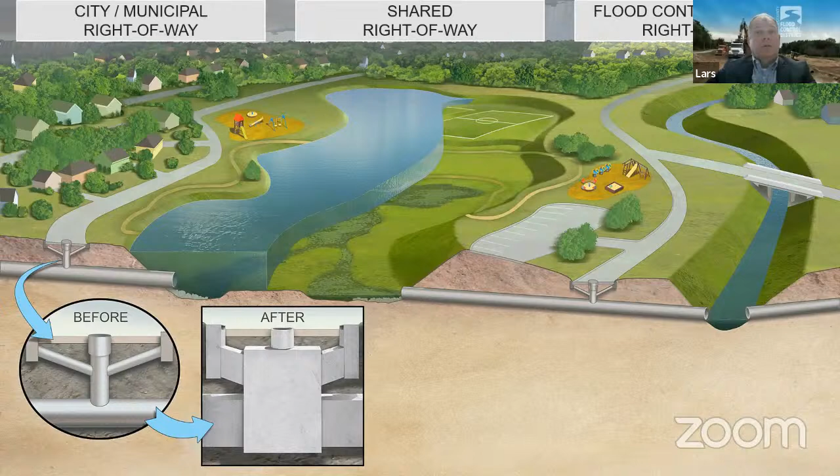On August 25th, 2018, Harris County voters approved $2.5 billion in bonds for flood risk reduction projects. This vote followed a series of 23 meetings with community members across Harris County, one per watershed, which resulted in a list of what is now 181 bond projects. The actual timing of each individual project depends on a variety of factors, including environmental permitting, right-of-way acquisition, and utility relocation, and in some cases, requirements of a particular grant. Project lists and projected schedules are updated regularly on our website at www.hcfcd.org.

As bond projects move forward, we are making significant progress toward resilience in Harris County. We shared an update with Harris County Commissioners Court in October of 2023 and highlighted a few notable statistics. Since the inception of the bond program, we have completed or closed 29 bond IDs, secured $1.7 billion in partnership funding to stretch the bond funds even further through our community, and hosted more than 195 community engagement meetings where we received more than 9,000 comments from attendees. Your input is critical to our efforts, and we want to ensure our conversations continue. We will continue these updates moving forward to share progress on the program.

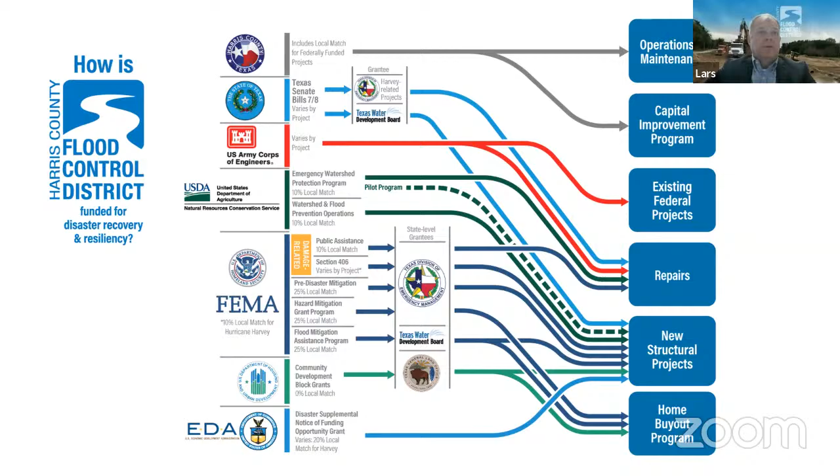We will now move into the part of the program that is specifically about Halls Bayou watershed and the tributaries P118-23-00 and P118-23-02 conveyance improvements and related stormwater detention project.

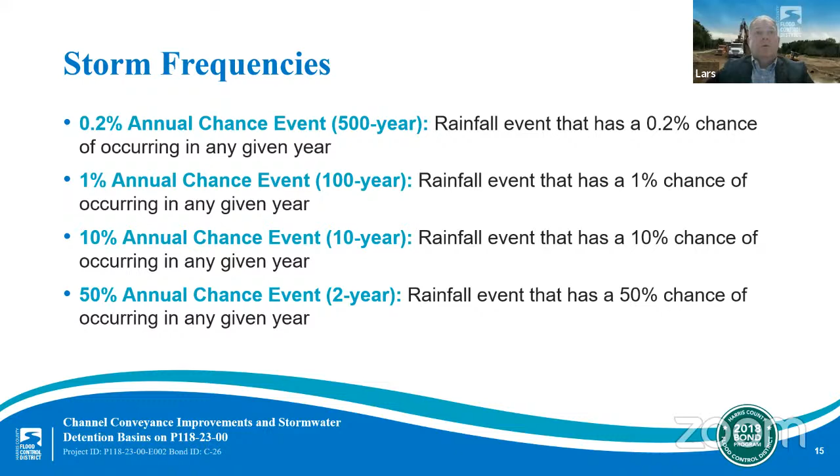By the same token, a 10% chance or 10-year event is a rainfall event that has a 10% chance of occurring in any given year. And a 0.2% annual chance, or 500-year event, has a 0.2% chance of occurring in any given year. It is also important to note that the precipitation depths for each of the specified frequencies are based on statistical data, and they are not related to each other. For instance, a 100-year storm does not have 10 times the rainfall of a 10-year storm.

Now we will get into more specifics of the project we are discussing tonight. The proposed project is bounded by Hardy Toll Road to the east, Airline Drive to the west, Canino Road to the south, and Halls Bayou to the north. The project is also located near the Melrose Park subdivision.

The objective of this project is to improve the system carrying capacity of tributary P118-23-00 to withstand a 100-year event, and to improve the capacity of tributary P118-23-02 to withstand a 500-year event. Please note that these are pre-Atlas 14 numbers.

It is also important to keep in mind that the full benefits of these projects will not be fully seen until Halls Bayou backwater issues are resolved. When Halls Bayou floods, the backwater from Halls Bayou may enter into these channels, reducing the effectiveness of the channel conveyance improvements.

The Halls Bayou backwater issue is being mitigated through a number of other projects proposed along the main stem of Halls Bayou. Despite the problems caused by Halls Bayou backwater, this project is still very important to long-term flood risk reduction in this area. Finally, the goal of this project's preliminary engineering stage is to provide a feasibility analysis and preliminary design of the recommended alternative.

A preliminary engineering report, or PER, will be transmitted to Harris County Commissioners Court once public comments from tonight's meeting are incorporated.

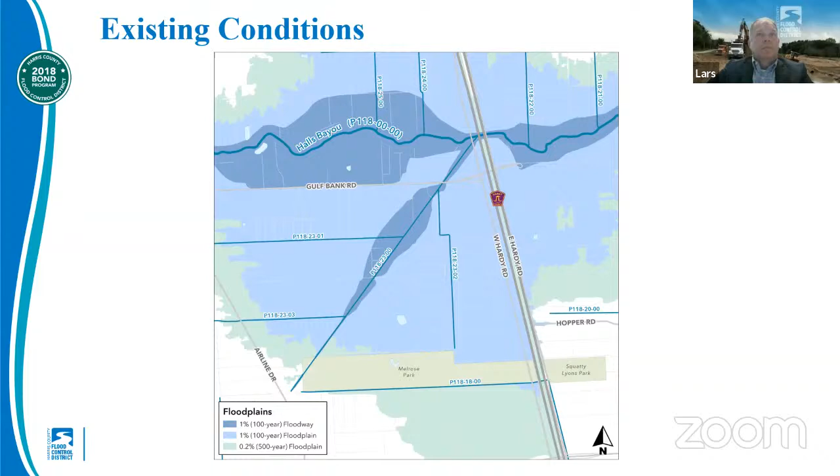I'll now discuss the phasing plan outlined in the PER. In phase 1, the flood control district will construct basins 1 and 2, which will mitigate the impacts from the future P118-23-00 and P118-23-02 channel conveyance improvements. The channel conveyance improvements will increase the conveyance, so constructing the stormwater detention basins will ensure that we are not moving the flood risk elsewhere.

Phase 1 will also construct the mentioned channel conveyance improvements on channels P118-23-00 and P118-23-02. As part of this phase, the channel flow line will be lowered, which will facilitate the City of Houston's Melrose Park subdivision drainage project. Phase 2 will construct stormwater detention basins 3 and 4 at the same time the City of Houston begins construction on their Melrose Park subdivision drainage project.

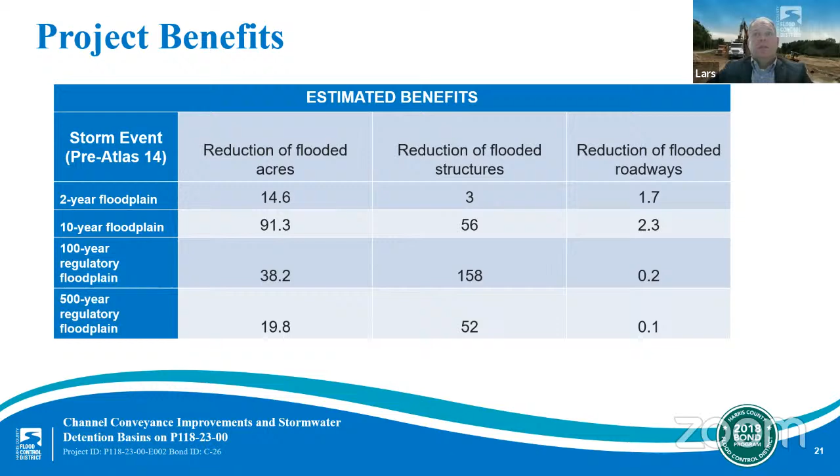This slide shows the project's estimated benefits for flood risk reduction. As you can see on the chart, this project is estimated to remove the 100-year regulatory floodplain from 158 structures and to remove the 500-year regulatory floodplain from 52 structures. Additionally, the 2-year floodplain will be removed from 1.7 miles of roadway, and the 10-year floodplain will be removed from 2.3 miles of roadway. Overall, the 2-year floodplain will be removed from 14.6 acres, the 10-year from 91.3 acres, and the 100-year floodplain from 38.2 acres. You can see additional data on the estimated project benefits in this chart.

I'll now discuss the project outlook and the next steps. As mentioned earlier, this project will be closely coordinated with the City of Houston's Melrose Park Subdivision Section 2 Drainage and Paving Improvements Project. Once completed, this project will drain into the P118-23-02 channel. The North Harris County Regional Water Authority, or NHCRWA, is also constructing a 96-inch diameter water line in the project area. We have already coordinated with the NHCRWA to make sure that the two projects have no direct conflicts, but coordination will continue as we progress with the project.

The estimated total cost of this project through construction is approximately $52.5 million. The Flood Control District is working to secure funding that will be used to construct the full project. The Flood Control District could receive up to $49.7 million from the U.S. Department of Housing and Urban Development through their CDBG-MIT program, administered by the Texas General Land Office through the Community Development Block Grant Mitigation Program, or CDBG-MIT. This is part of a more than $500 million application that will fully fund projects across the county, including 6 in Halls Bayou. An additional $2.8 million of the cost of this project will come from the 2018 bond program.

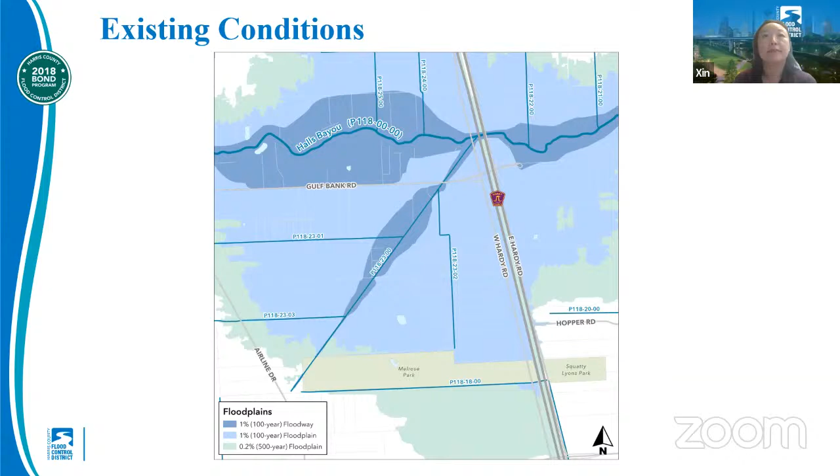Thank you. Our next question is for Gary. Gary, how has this project progressed so far?

If you could move to slide 17, please. The feasibility study for this project was completed in 2020. At that point, the PER stage began. And in 2021 and again in 2022, the scope of the PER was expanded to include the evaluation of additional areas for a detention basin and to reduce the right-of-way impacts on this project on the surrounding community.

So we're basically moving through what we call our project life cycle, which begins with feasibility, which is complete. And we're currently in the PER stage, as we've talked about, and we're trying to wrap up the alternatives so that we can continue to move the project forward.

All right, thank you, Gary. Our next question is for Lars. Lars, what is the recommended alternative for this project and why was it chosen?

Thank you for that question. So the feasibility study evaluated 8 different alternatives. The recommended alternative was alternative 8. That alternative included 3 components.

First, the improvements to the P118-23-02 tributary. Second, the addition of 4 additional detention basins along the P118-23-00 tributary, and then finally improving the P118-23-00 tributary from the confluence of P118-23-02 to the upstream end of the Gulf Bank Road Bridge. And the primary reason why alternative 8 was selected is because it offers the greatest benefits in terms of the flood risk reduction at the most cost-effective manner.

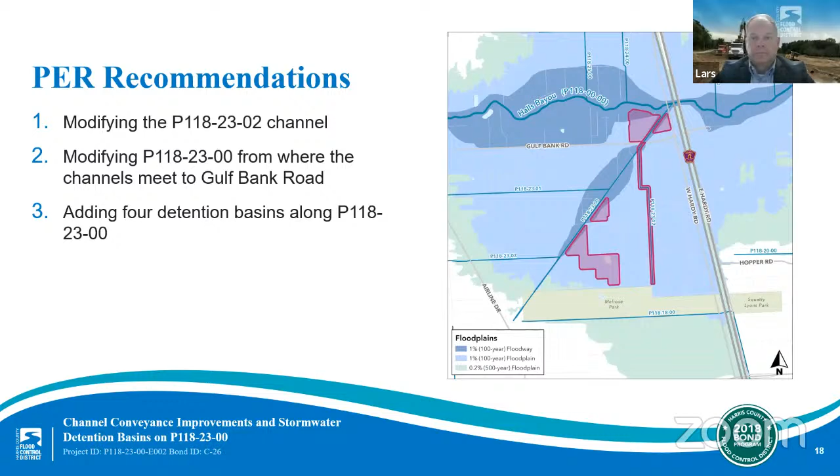All right, thank you, Lars. And one more question for you, Lars. Amanda is asking, will the drainage ditches within the Melrose subdivision be improved?

So if you could go to slide 17 again. So the Harris County Flood Control District will be, I'm sorry, the one with the map, I misspoke. But the...

P118-23-02 tributary will be improved as the backbone within the Melrose Park subdivision. The City of Houston's project will improve the conveyance and the laterals on the east and west side of the 02 tributary to convey those waters to the flood control ditches.

All right, thank you, Lars. Our next question is for Xin. Xin, what is the total amount of funding secured through CDBG?

Sure. Thanks again with the question. Countywide, I think the CDBG MIT program has more than $500 million allocated across 18 projects. And the DR program has more than $300 million across 14 projects.

The Halls Bayou itself envisions to receive 179.1 million, or over a third of these funds, for the projects in the watershed. For this particular P118-23 project, the total cost through construction is approximately $52.5 million. The flood control will receive up to 49.7 million from the CDBG MIT program.

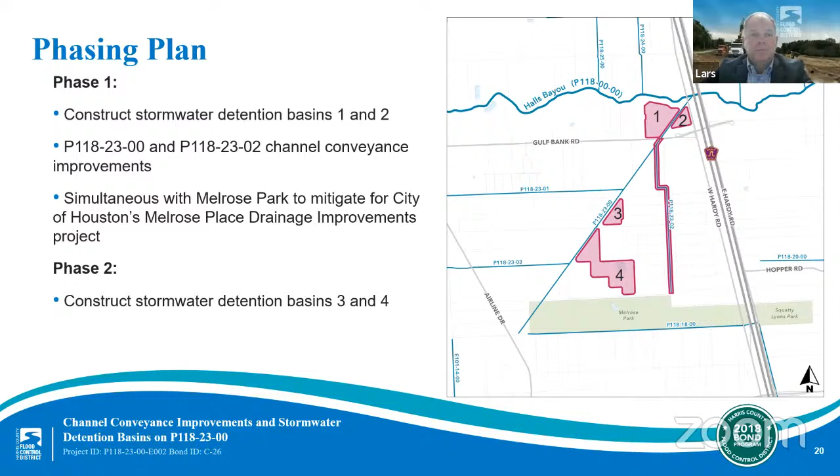All right, thanks, Lars. Our next question is for Xin. Xin, how will the City of Houston and the Flood Control District work together on this project? Sure, thanks for the question.

I'll follow up - like Lars previously mentioned, we are coordinating with the City of Houston very closely regarding these projects. That's one of the main reasons we split the construction phases. We want to ensure the Melrose Park subdivision Section 2 drainage and paving improvement projects can be constructed in time. For many of our projects, the Flood Control District has collaborated with the City of Houston to work together on reducing flood risk in our community.

Thank you, Xin. Our next question is for Gary. Gary, how will this project impact the pipeline being constructed by the West Harris County Water Authority? We touched on this earlier in the presentation, but the Flood Control District is aware of the plans for construction of a 96-inch diameter water line pipe in the project area.

It's very important, since we knew about this coming, that we coordinate. We've been coordinating throughout the life cycle of this project, and currently there are no direct conflicts between this project and that pipeline, primarily because we knew about it and were able to make sure what we're doing and what they're doing are designed to be compatible if there were ever any possibilities.

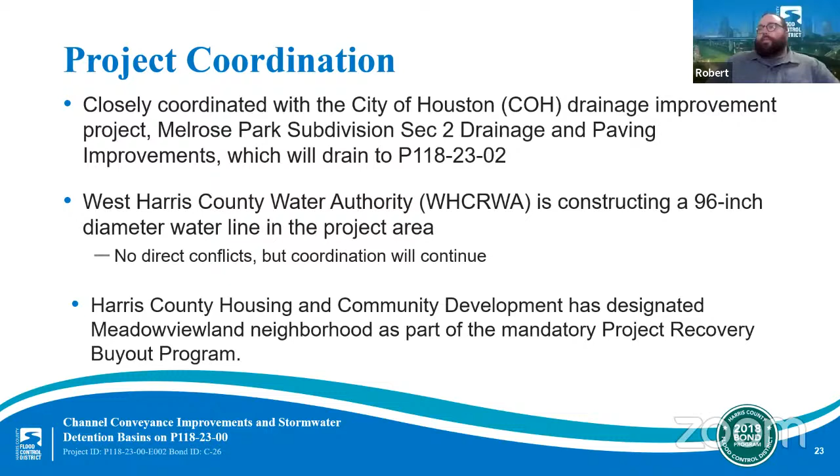All right, thank you, Gary. Our next question is for Xin. Xin, how does the CDBG MIT program work?

Oh, Xin, you are muted.

The CDBG MIT program, or CDBG mitigation, is focused on projects to mitigate future disasters and flooding. The program's criteria is similar to the other CDBG DR, with 53% of funds must be spent in a low to moderate income census tract or a census block group with a 51% or higher LMI index. Once that criteria is met, urgent need projects can receive funding even if they do not meet the minimum LMI requirement.

Our next question is for Lars. Lars, what is the deadline to spend the CDBG MIT funds? Thank you for that question. So the deadline for when we must expend the CDBG funds, having a misalignment with some of my notes here, I believe that currently it is March 31st of 2027.

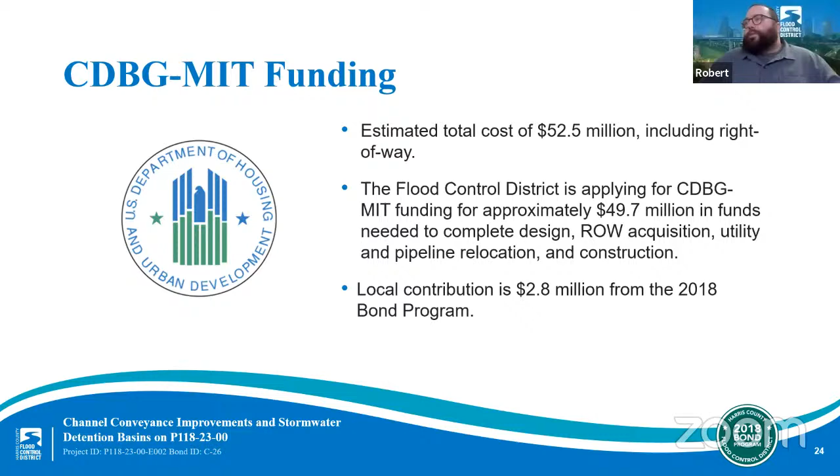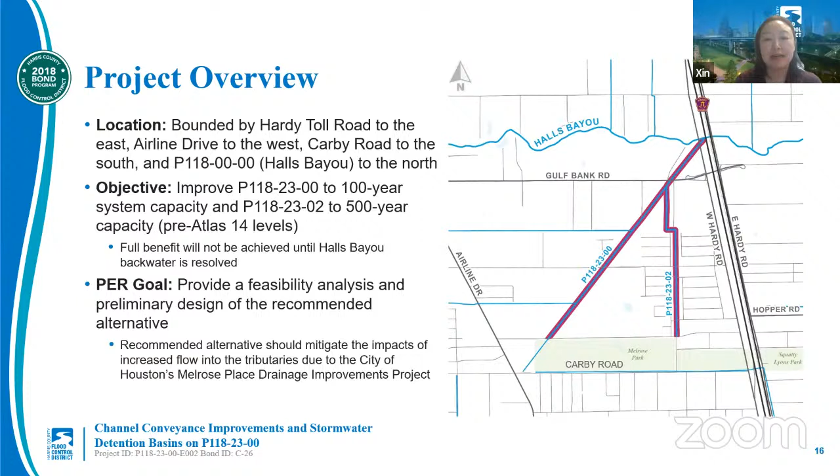Thank you, Xin. This next question is also for you. Xin, how many projects are currently under construction in Halls Bayou? We have another project we just recently kicked off construction on. It's phase 2 of bond ID 35. We started last month, and the first phase was constructed along the Little York and Hopper Storm Detention Basin. In this second phase, we are making drainage improvements along the tributary P118-14-00 channel.